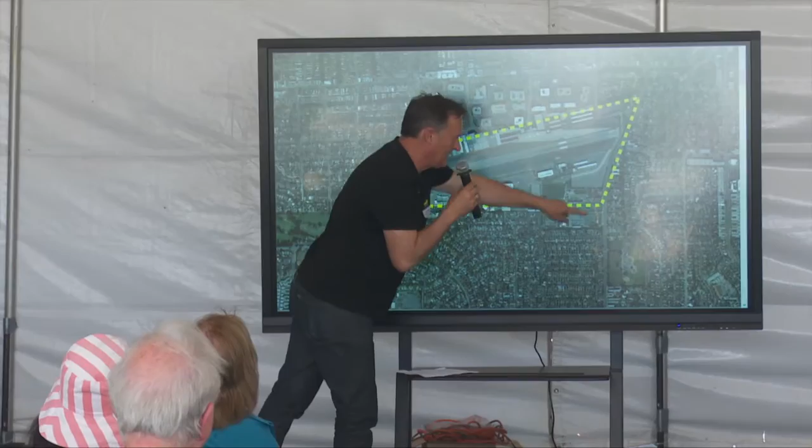A lot of you remember this diagram - I think there are some copies of it. About two years ago, we worked with the airport to park, and this is a diagram that shows what we heard, a listening diagram. Through a whole series of exercises and design ideas, we compiled everything we heard about what people thought might work in the park. It's important to keep in mind that we're working in this area, but we want to make sure anything we do here could conceivably work with the bigger idea.

So today we're really excited to start talking about this first 12 acres. With the existing 8 acres in the current park, we have about 20 acres to start with, which is an amazing public open space. But all the decisions we make here, we want to keep in mind that someday they might have a bigger expression. So we keep looking back at this diagram.

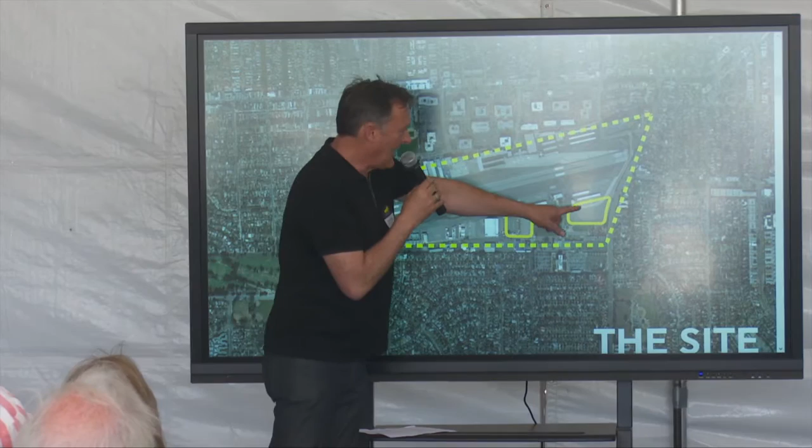So here's our site, and we're in this location right here. There are two specific pieces of the site - one is the tie-down area up here that's just a little under 7 acres, and then the area by Barker that's a little over 5 acres. They're disconnected sites.

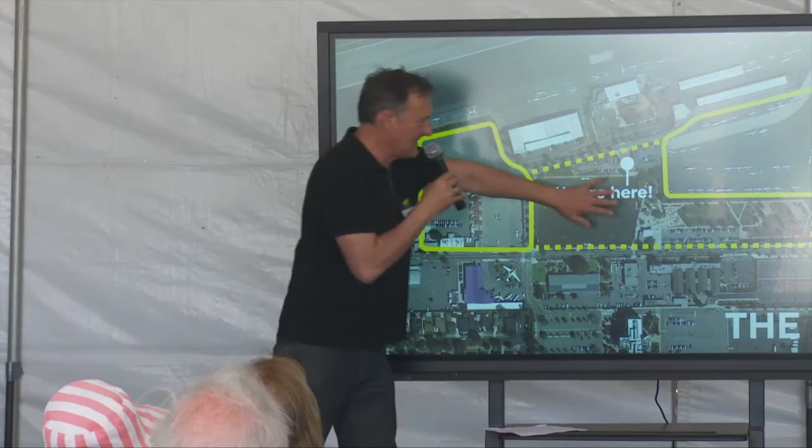One of the things we're really excited about, and that I think really shows the foresight of the city, is they're saying you can look at the entire parcel and think about the whole piece, how it all works together. Your work is really going to be located in this location and probably in this location, but we really don't want to have three disconnected places - this place, and that place. So if we need to start making modifications to tie all this together, let's find the best solution, the way to really make this a cohesive 20-acre place as opposed to a 6-acre place, an 8-acre place, and a 6-acre place. I think that's really important.

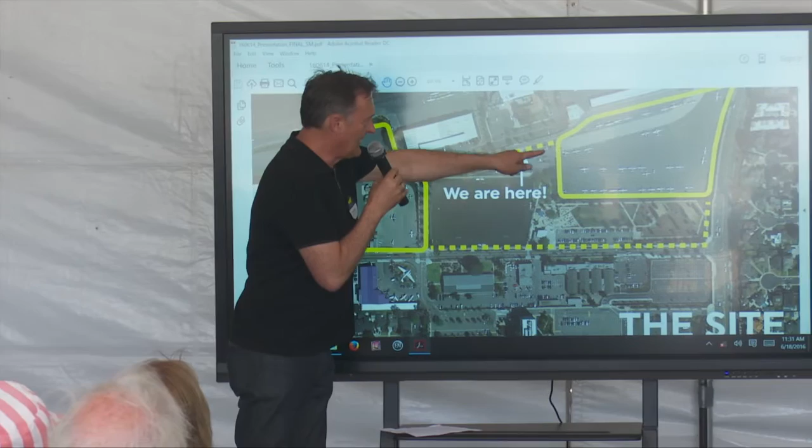So we're right here, the other tent is over here. Those cones I talked about are all lining up out to the street, and the other tent is over in this location. Thank you.

It helps us inform ourselves about how big this place is. I think we want to always be doing our work in reference to what's happening globally. How do we design a park here that's really part of a whole global conversation about open space and recreation? So we always look at the best examples globally to inspire how we make decisions here. There are two examples I want to show, which are pretty simple, and we've talked about them a lot, probably many of you have been to both these places.

Culture. In both the High Line and in Tempelhof, the idea of trying to have some kind of memory of the place was really important for those designs. So we keep looking back at the history of the airport and its different periods of development, trying to understand how we can tell the story of that industrial landscape.

The solution we come up with collectively needs to be beautiful and light-handed—not thematic and gimmicky—but it needs to address this site and what its role has been in the past. Our goal is to have flexible spaces so different kinds of community events can be set up, different fairs and festivals, and a range of other community activities, which might also include some community gardens.

In the various tents, you're going to see lots of images of different kinds of things that might happen in the park, and we'd like your input on what your priorities are. There's probably not room for everything, so part of the goal for today is to get feedback on what you think is essential and what you'd like to have if there's additional room.

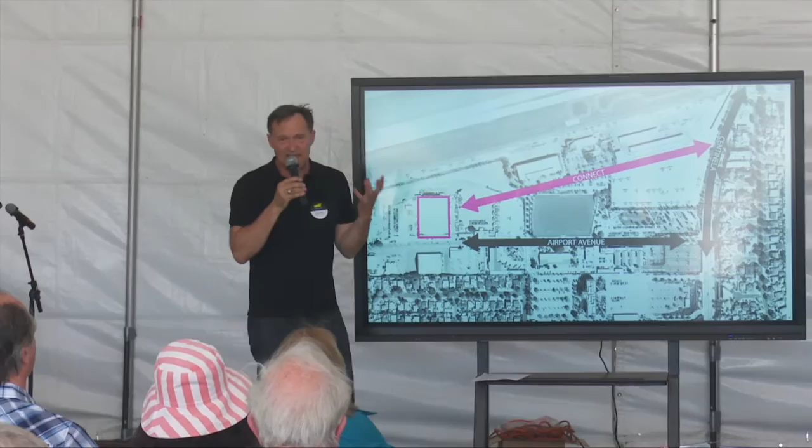You can drive by on Bundy pretty quickly and not necessarily notice that intersection, but you don't have a lot of visual connection. One interesting thing about this site and its layout is there's a direct link between Bundy, where the ground is exactly level with the street, and if you run parallel down to the existing buildings and the runway, how it connects to Barker. There's a very clear linkage.

I think one of the ideas we feel is pretty important is to try to find ways of making the park visually open to the community, giving it more presence. Although you may not enter the park at this point, you should visually and emotionally know the park is there. That's really the front door for what we're doing. And the idea that Barker, and events that happen here, could also be a terminus for this link that might join all these different places together is a preliminary design idea we've really been exploring.

So I want to show you three options, and all the different options are basically looking at three or four different criteria, with each option prioritizing those criteria differently.

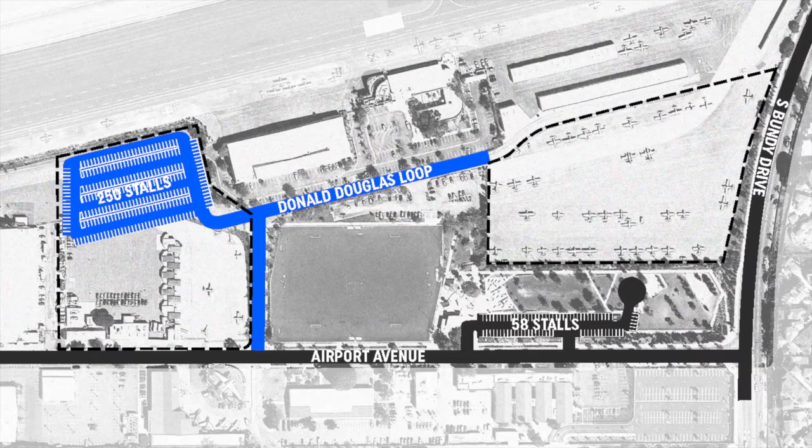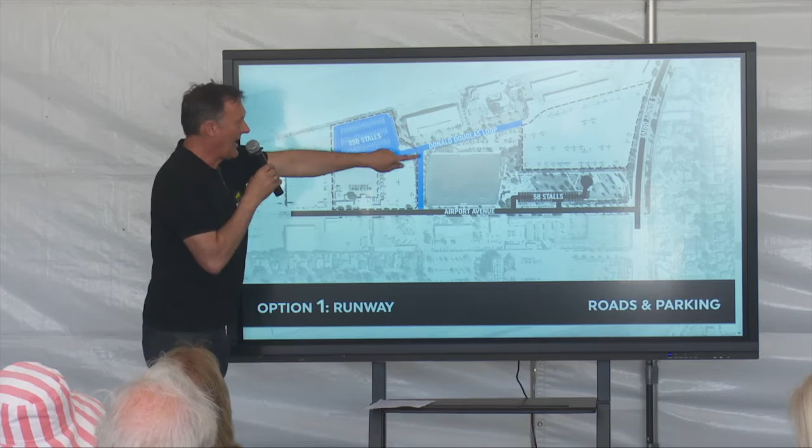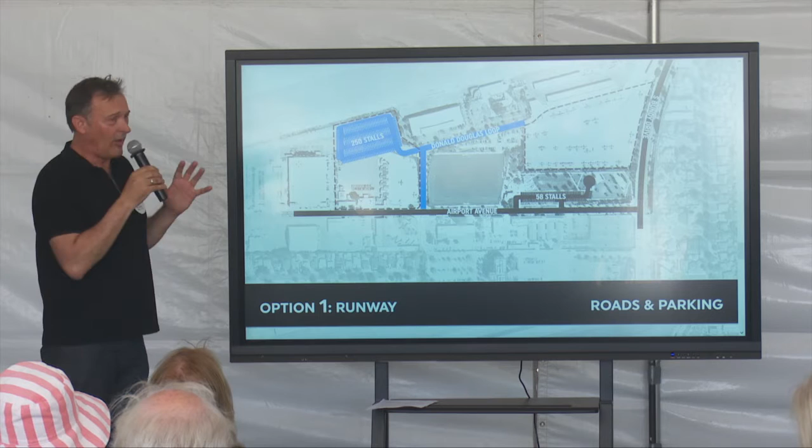One of the first important things to resolve is how do we circulate, how does the circulation work for the new park. So this option, scheme 1, we're calling the runway scheme, just so we can all address it in the same terminology. This scheme basically says let's keep the Donald Douglas Loop Road where it's located, so we don't change that, but we take the area of the tie-down area closest to the runway and make that a much larger parking area. This gives us about 250 stalls of parking, and when you look at the quantities of all the fields and park spaces and do parking studies, generally about 200 to 250 parking spaces would be the usable number for all those facilities.

This area of the site, because of some noise issues and its proximity to the runway, seems like a really good place to put the parking. So scheme 1 basically takes the existing road, creates a loop, and uses that as a parking place.

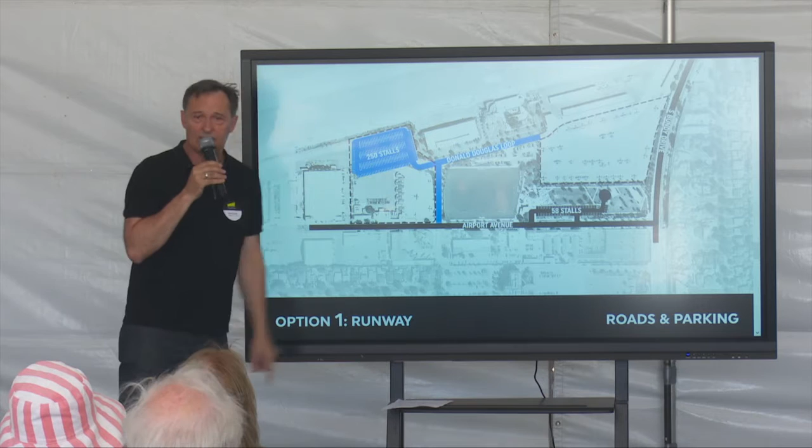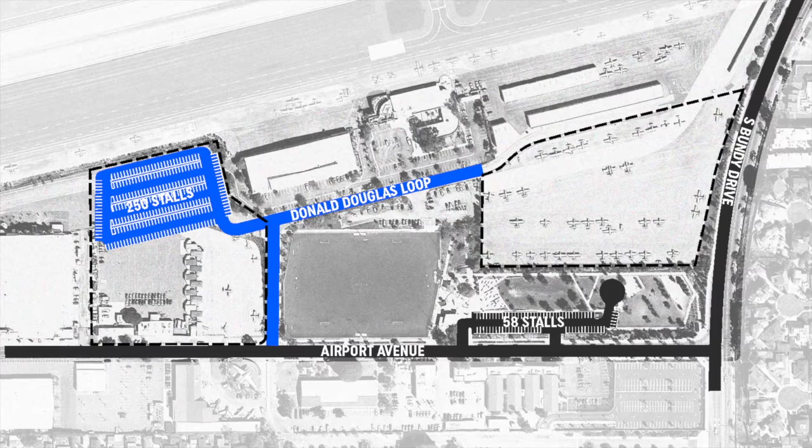Some of the disadvantages of this scheme are that the road basically goes through the middle of the park, so to get from one end of the park to the other you need to cross the road. That could be considered a disadvantage in terms of circulation and safety, but this is certainly a more economical solution because we're not spending the dollars to move the road or reconfigure it in some other way. So there may be trade-offs with that.

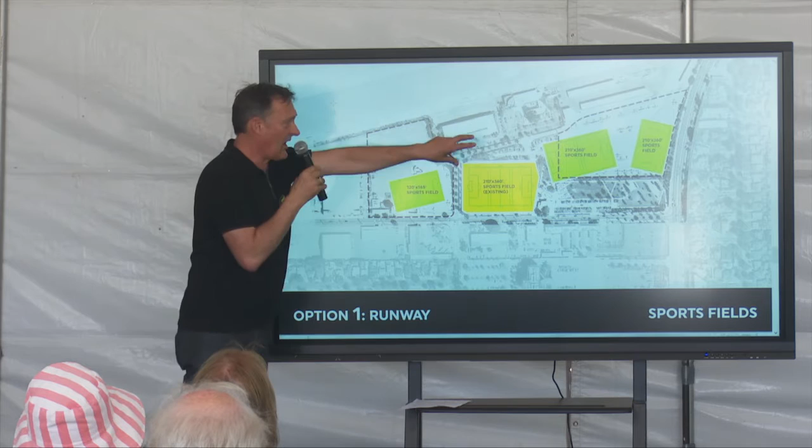Scheme 1 looks at adding 3 more sports fields, for a total of 4. This is the existing field right next to us right now, and we're looking at adding 3 other fields of varying sizes that can be broken down in different ways. We'll talk more about them in detail at each scheme about how those fields would be used, but you can see how they're working on the site.

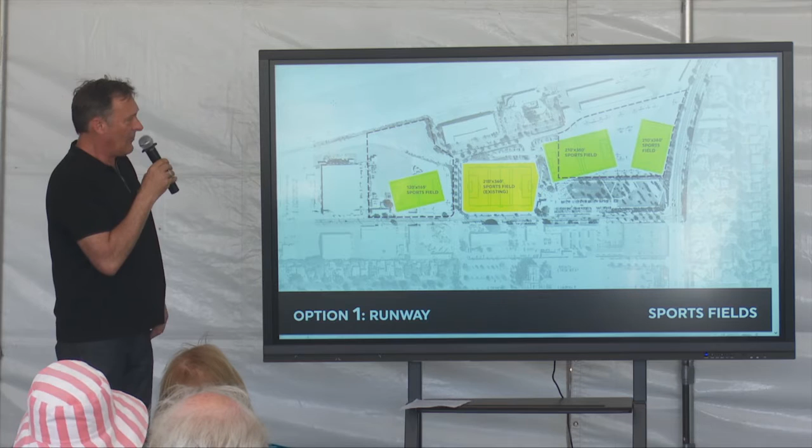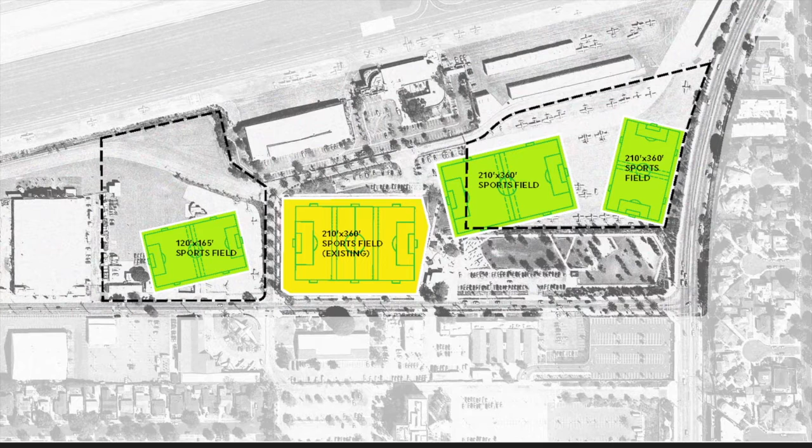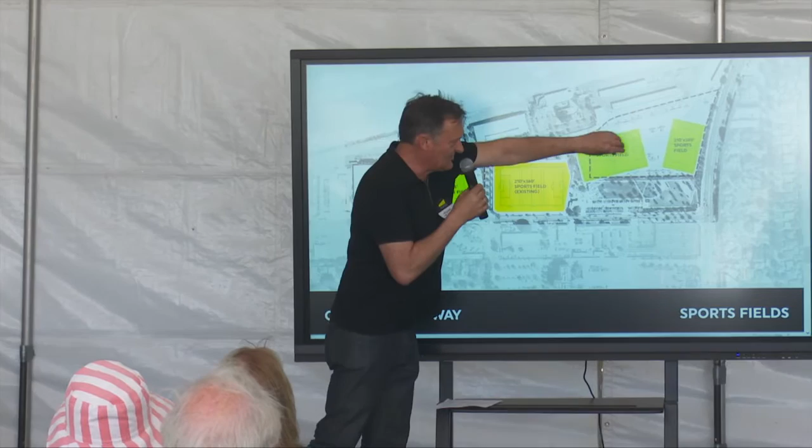One thing we've been very conscious of is that because of all the fencing requirements for fields, if you make them touch each other and align them right next to each other, you end up with these very long barriers or walls. So in all of our schemes, we've tried to break up the connections between the fields so we can do other things with them, whether they're places for landscape, circulation, places to view the games, or other amenities. If we made them touch each other, there would be a wall separating this side of the park and that side. By separating them, you get the possibility of having linkages and connections, which seem really important to integrate the park together.

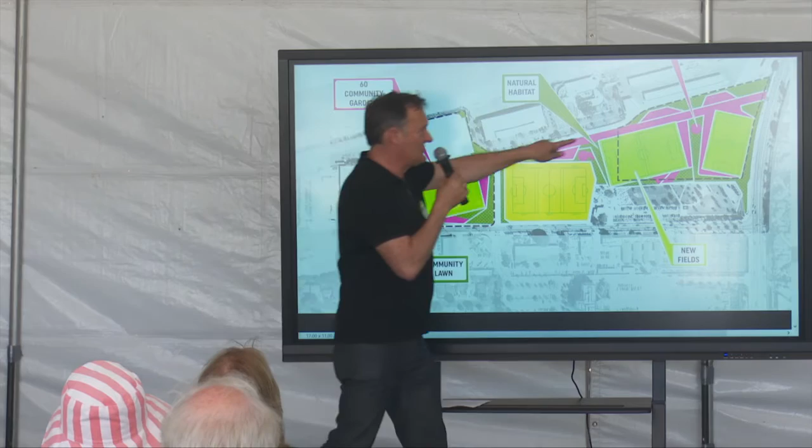This is a diagram for our first scheme, the Runway, which looks at how those other spaces might be used. Here you can see the existing road that comes in, Donald Douglas Loop goes along this area to serve the existing buildings, with the parking lot over here. There are the 4 fields, and then a circulation path that basically links all the fields together, which you see in pink—that's the runway.

We're seeing that as a multi-use pedestrian walkway, and there are many ways it could be organized—by speed, so walking might happen one place, bike riding somewhere else, running somewhere else. But the idea is that all these spaces are linked together by this big circulation linkage. The cones out there that I mentioned are an example of how wide that would be, and those cones are located right here.

Flexibility is very important, and one reason this scheme is strong is because there are lots of other ways it could be used. For example, a festival could be set up from here to here with booths and tents, and occupied in many kinds of ways.

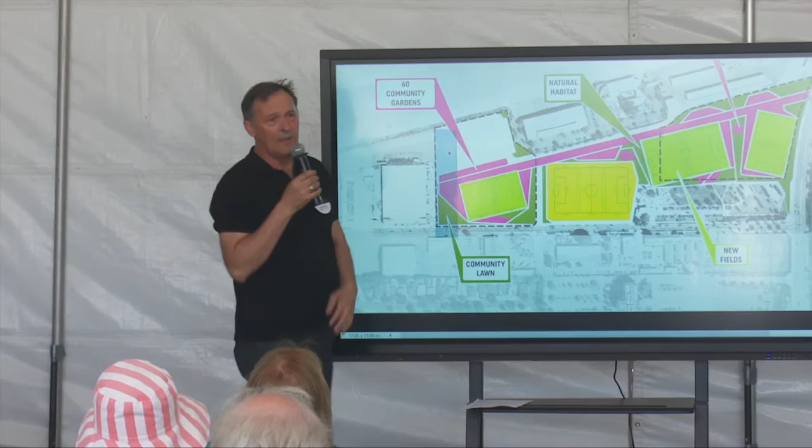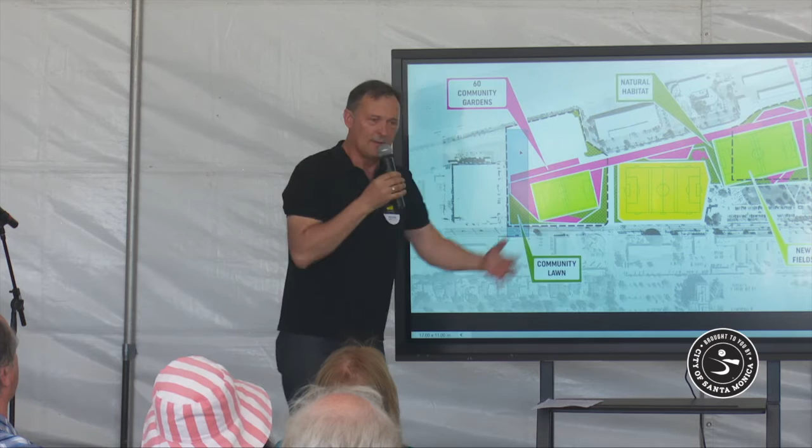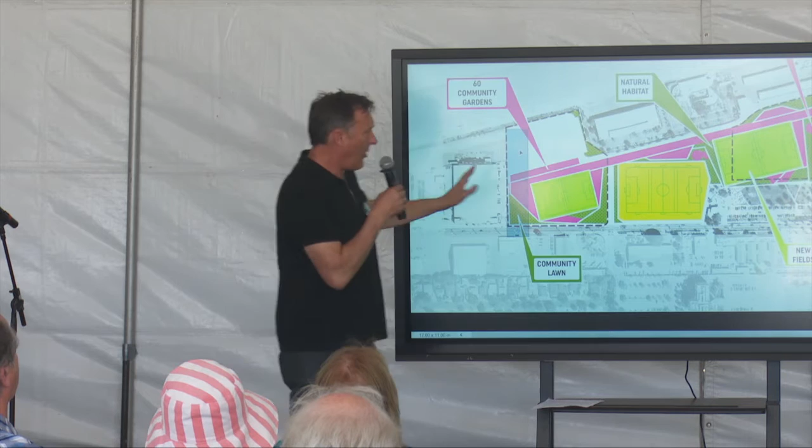So in this scheme, the principal pedestrian organizing feature is this runway piece. Then in between each of the fields, where you see this green dot, we're bringing back this landscape of the natural habitats. In those places, we're taking up the ground, the concrete, regrading it, creating berms in various places, and dealing with issues of water—it's all being drained to those landscape areas. It's also the place where we get shade.

One of the things we're all very aware of here today is that it's pretty hot and sunny. So by having these serpentine landscape pieces between the fields, we get lots of places to have shade pockets where people can hang out.

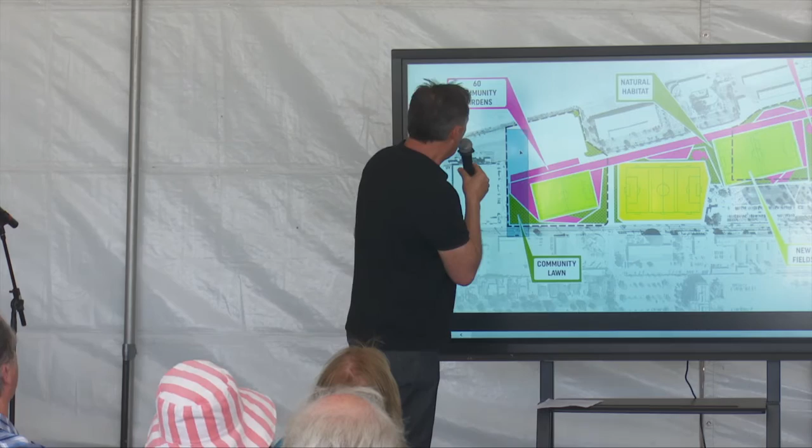In all of our schemes, we're also trying to include other kinds of functions. So in this scheme, for example, we're putting some community gardens in this location. That seems like a good place for them because it's next to the parking lot, so you can park your car and use the community gardens. People also see the community gardens as they're going to the park, which gives really nice visibility.

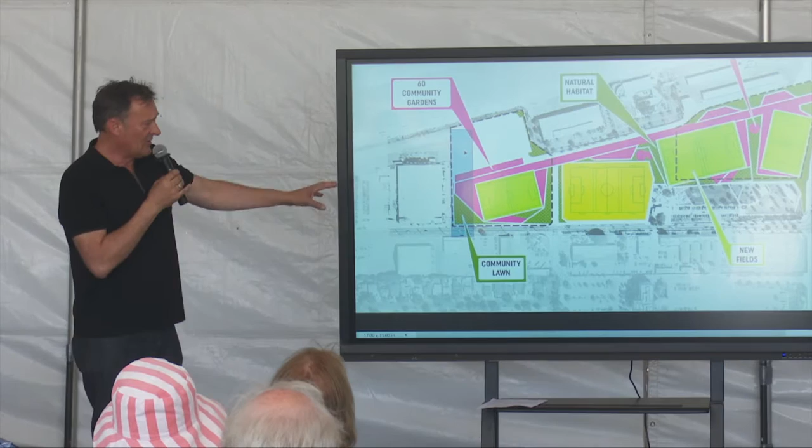The last important feature of this scheme is that next to Barker, we're talking about having a community lawn. Most likely all these fields will be artificial turf of some kind, so it'd be nice if somewhere in the park there's an actual lawn that could be used for open sports, festivals, or picnicking. We're trying to find a way to make that happen in this location, which I think is a good place for it because of the visibility it has from the main street.

And here is a plan of how all that might go together. There's a lot of information on this particular drawing, but when you look at the plan a little closer, you'll start understanding it.

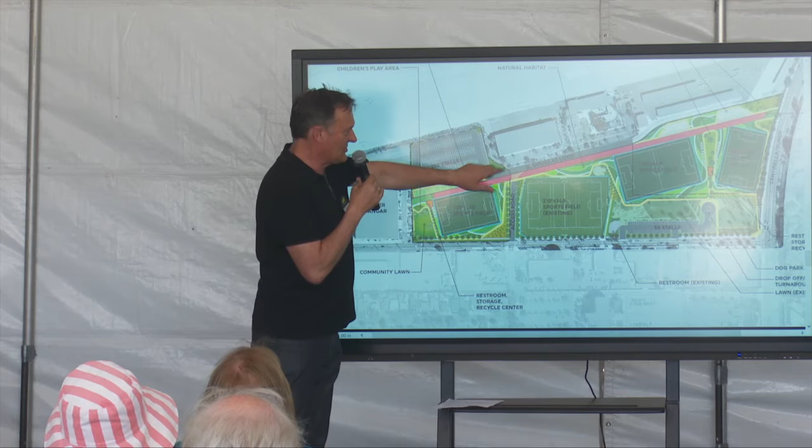Again, the main road stays in its existing location, as is Douglas Loop, the new parking lot. Here are the community gardens. Here's this pedestrian walkway, which goes all the way down the site, and you see it at the end of Centinela.

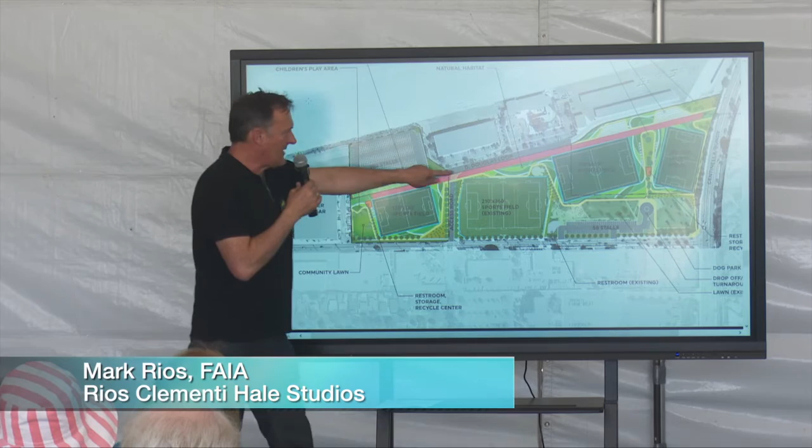It does cross the street here, so this is one location where pedestrians and cars have to be careful. Off of that, there are many paths and ways you can move through the site in a much more organic and natural way, and those are the foundation for this ecological landscape that has lots of shade in it.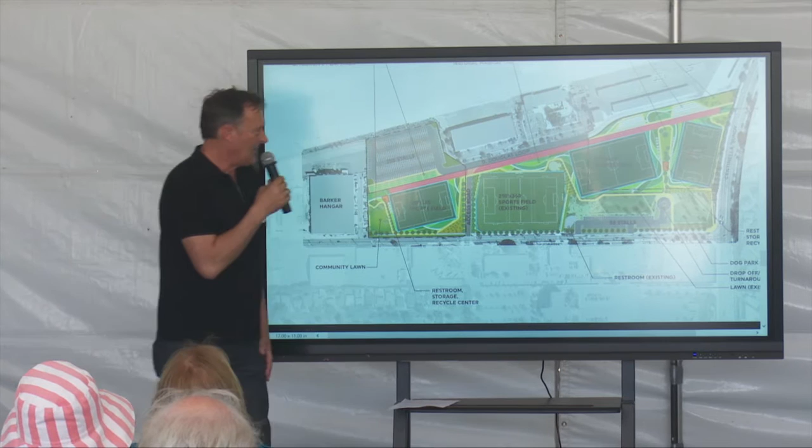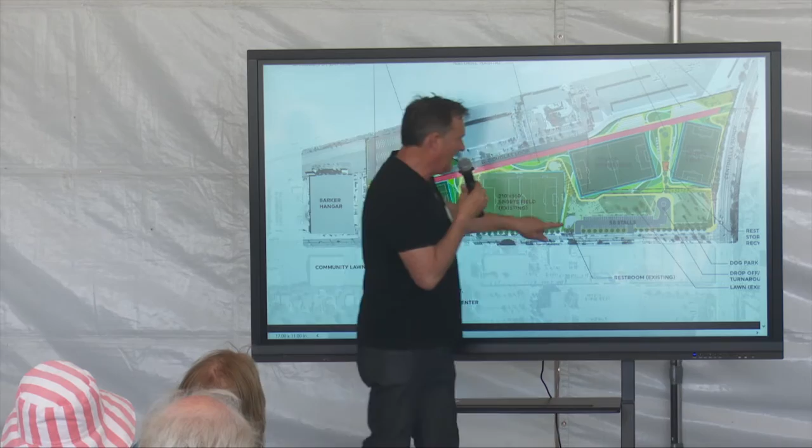We're proposing this scheme to build an additional restroom and storage building in 2 locations, one down in this location and one up here, and the one that's existing remains.

Each one of the places in the park between the fields has a different program role. For example, we're thinking this might be a children's play area over in this location.

There may be a berm here, so you can actually be up on this berm and look at the fields, or on the other side of the berm, look at the planes taking off. The berm also gives us a lot of acoustic separation, because this is really the noisiest end of the airport here, where planes are idling and about to take off.

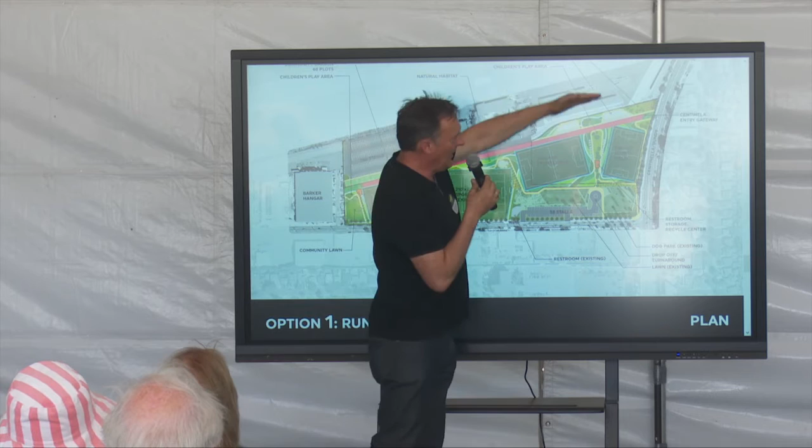This berm in this location really helps protect all the fields from the most intense location of noise. I'm sure you'll have lots of questions about the particulars of this scheme.

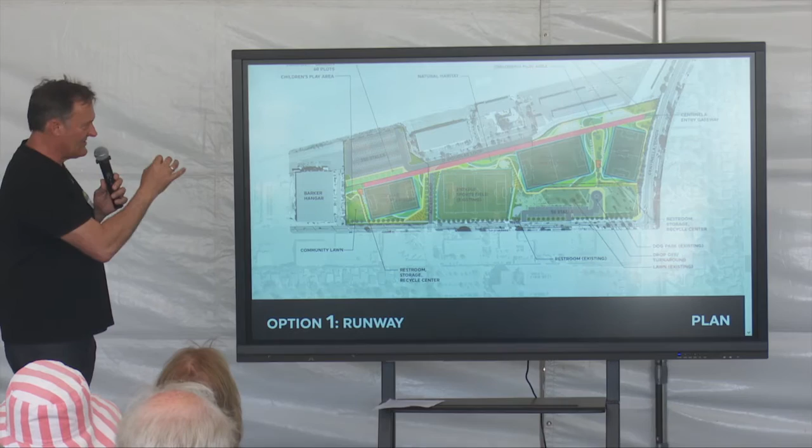I want to go through all the 3 schemes and then talk about them generally and see what questions you have. But the key things about this first scheme are the road stays in its existing location.

We have 3 new fields for a total of 4 fields. We have 250 parking spaces, and we have a very flexible pedestrian kind of open space that can be used and set up in lots of different kinds of ways, and definitely has a memory of the airport.

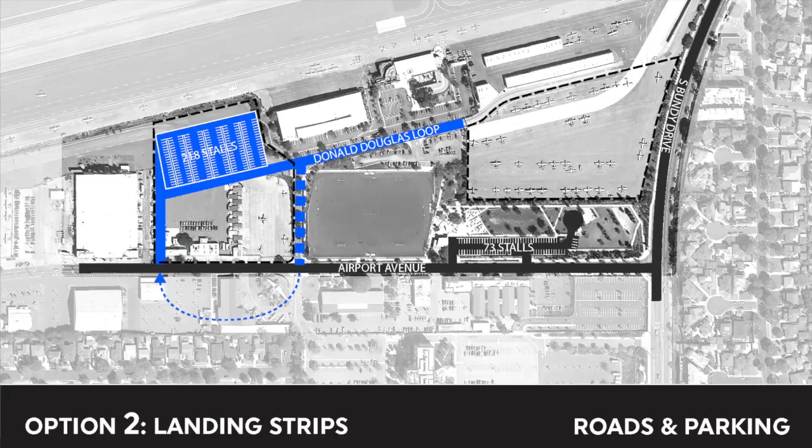Okay, scheme number 2. We're calling this one landing strips. So this scheme says, let's do something to make the whole park more continuous so a street doesn't bisect it.

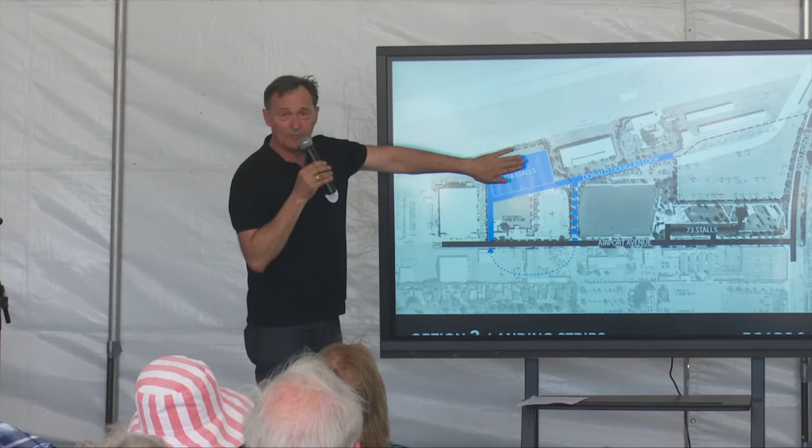So this is where the existing road is. We're going to take and shift it over next to Barker, and so you'll enter at this point and connect it with Douglas Loop. The parking is in the same location, but what that allows is that now the whole park is on one continuous piece of land.

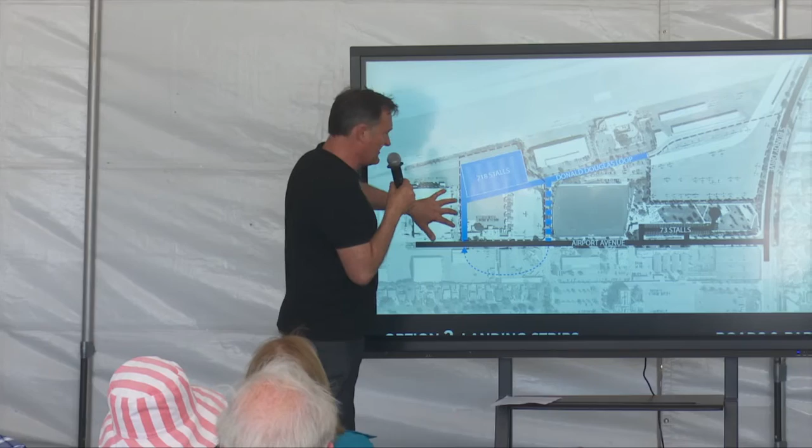There aren't cars going through it anywhere. And so just as far as safety and crossing a street and activities, it certainly makes for a better environment. It does involve more capital costs as far as moving the road down, but it gives us more freedom about how we actually plan and organize that space.

This scheme puts the road in between the parking. So although you don't cross when you're in the park, there is still a necessity that once you park your car, you have to cross the road to get to the park.

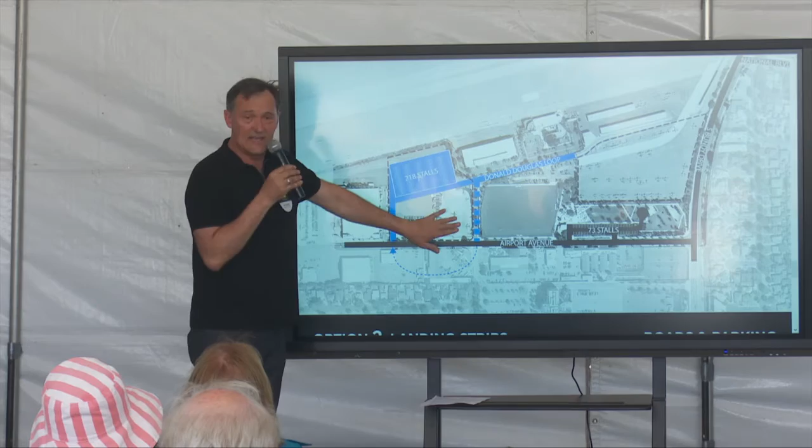And so there will probably be key locations where we have crosswalks, and parents might want to watch their kids at those particular points. But once you're inside the park, it's all continuous area.

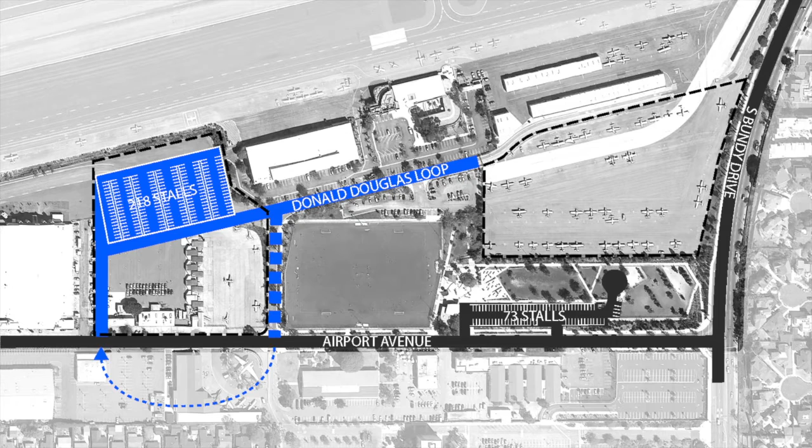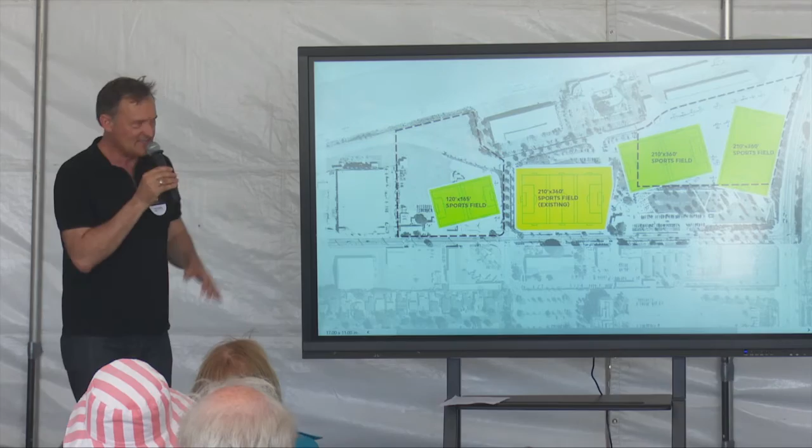So this scheme also adds 3 new fields. The fields are slightly different sized, and they're in different locations. And SportsForce can talk about the pros and cons of each one of those fields.

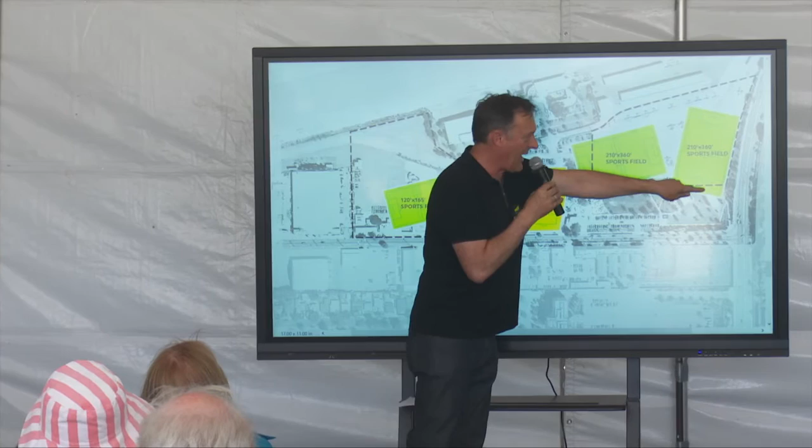We get a bigger field down here, and we're taking a little bit of the dog park. Not a lot, but just the very back corner in order to get that field to fit. But again, we're getting a maximization here of the park, having lots of sports fields in it.

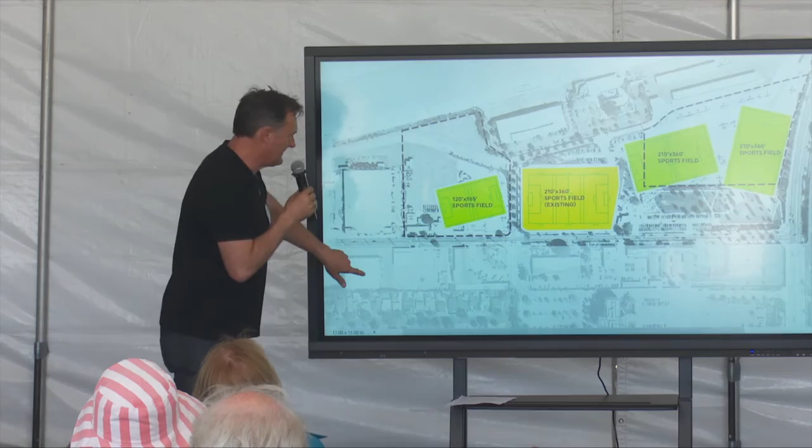This is a diagram of where other things are going. Here we're changing where the community gardens are located. So in this scheme, we're putting it on this edge of the parking.

And so it means that people going to the park are not necessarily walking through the community gardens. They see the community gardens, they're very present, but they're not en route to the park. There's slight separation.

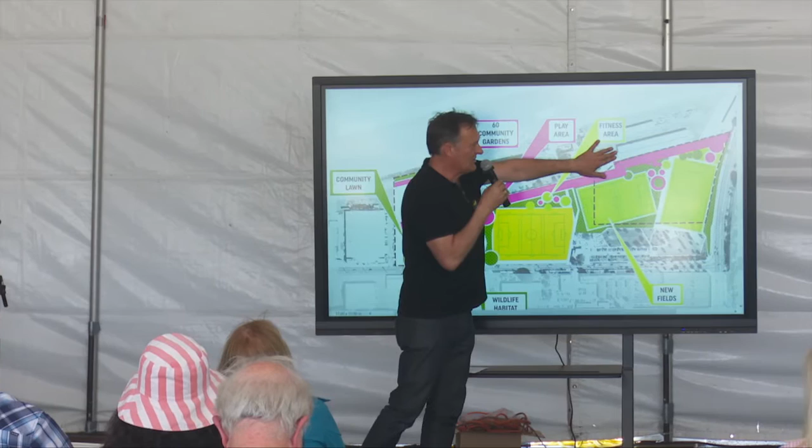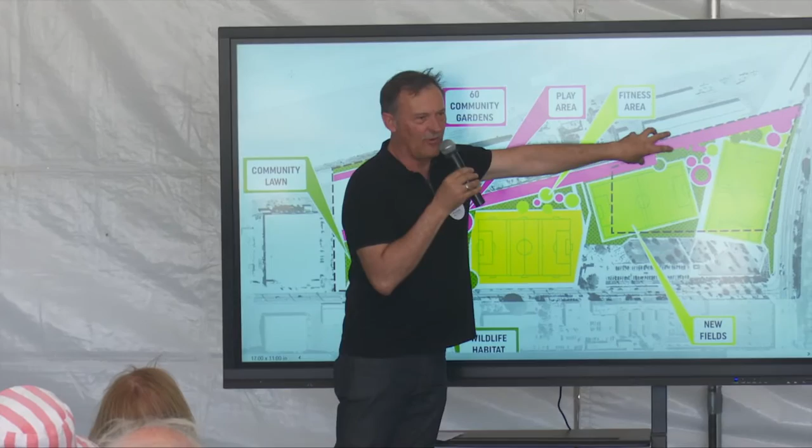We're looking at having key elements of program at each one of these points in between the fields, which you'll see in the plan. We're still having a berm to give us acoustic separation, but we're starting to break this long pedestrian path to create a special zone that might be used for other kinds of activities and events.

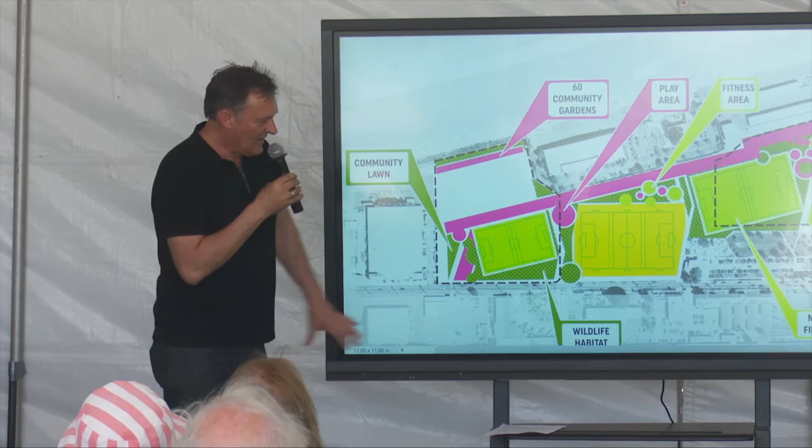This scheme still has a community lawn down at this end. Because we don't have a road in this location anymore, it starts opening up to the rest of the airport in a stronger way, because now there's a big landscape connection you can move through in between the fields and come to the main pedestrian walkway. This is how you move through from the existing restroom building and parking, and from the park you can also slide through that way.

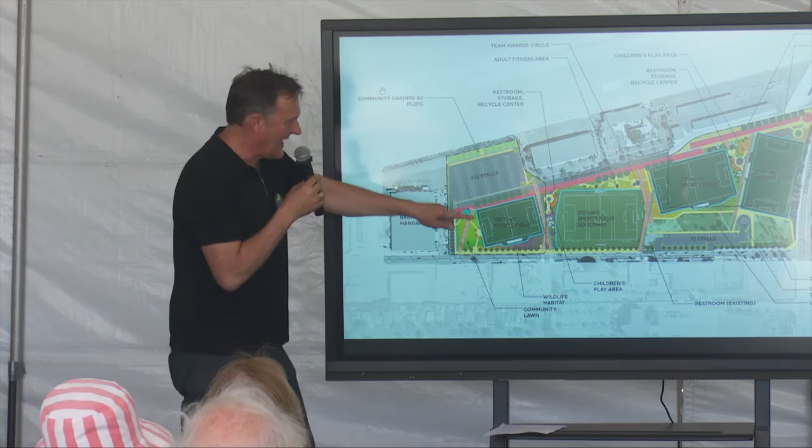This is a plan of scheme 2, the second option, where you can see how the road has been relocated. You can see these strong paths that bring you from the main road through and in between the fields to link with the main pedestrian area.

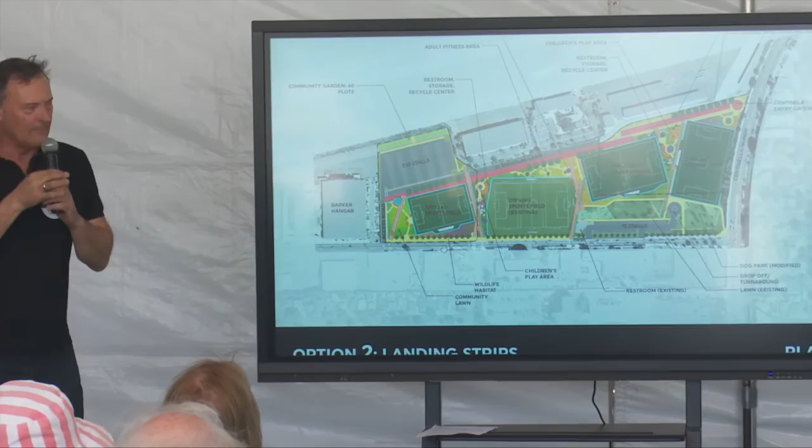Now, this is really not a design scheme, it's an organizational idea. You may look at this and ask why there are pink and orange lines drawn on the paving - we're not suggesting the paving is pink and orange. All we're saying is that it's a special pedestrian space, and it should be developed with a lot of rich ideas, which are yet to come once we know what we're designing. This drawing is trying to give a lot of character and help us understand where things are located and the nature of each one of those things. The design will develop once we know what all those locations are.

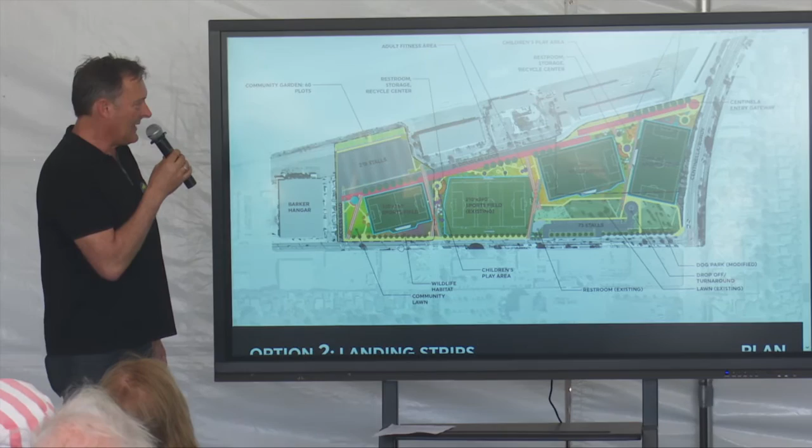In this scheme, we're looking at having a new restroom area located here, and we're thinking about keeping the existing restrooms over at that location. Some of the other amenities we're adding include adult fitness areas. There's actually another restroom we're adding here, so we'd have one there and one over here, and a whole series of picnicking and community spaces along the main walkway area.

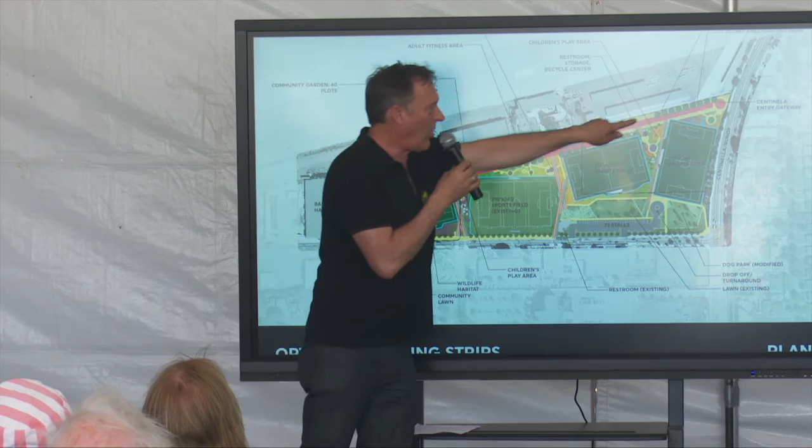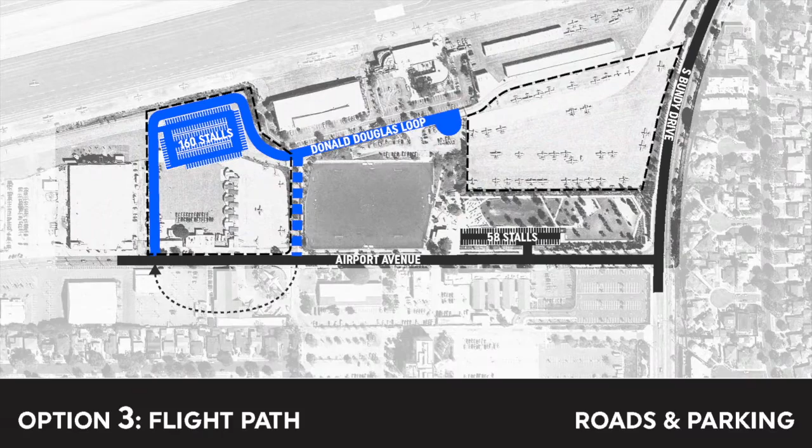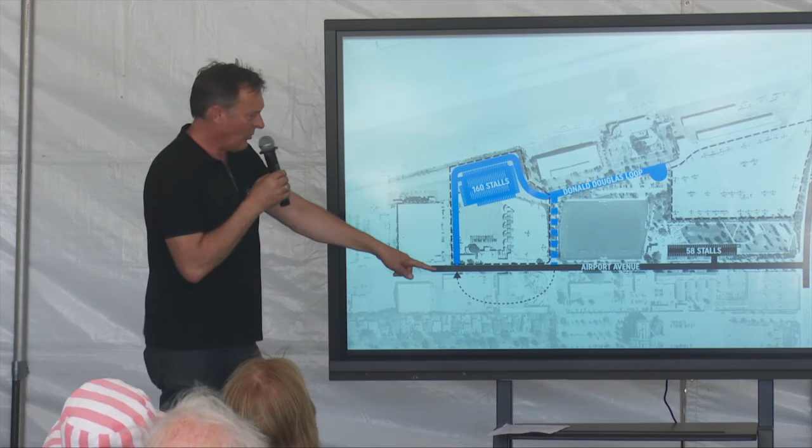The third scheme, Flight Path, does another move with the circulation of the roadway. We're taking this one out, making the main entry be at this point next to Barker, but instead of having it line up with the existing Douglas Loop, we're wrapping it around over to the runways and back around, putting the parking lot on the inside of that.

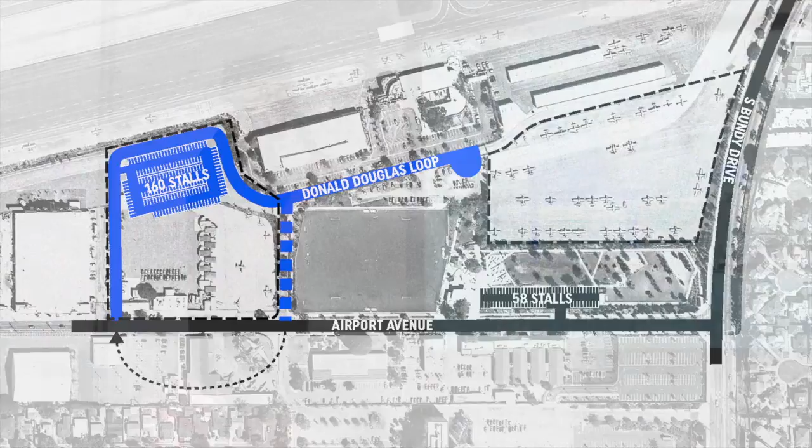The pros of this scheme are that once you park your car, you're immediately in the park and not crossing any roadway, so safety issues are really minimized. The disadvantage is we have a lot of roadway, so we're paving a lot of area that we might do something else with, giving up more space to road and paving than to ecology and garden.

One thing we're all trying to evaluate is where on the scale of having no intersections of cars and pedestrians do we want to be. Do we want a scheme like this where we completely separate it, with certain pros and cons? Or can we live with it between the parking and the park? Or is it okay for the path to actually have to cross it? We'd like your input on all of those positions.

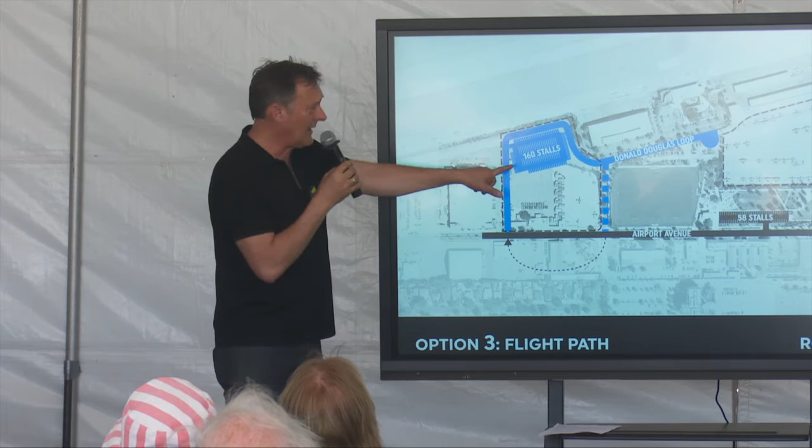One other thing to note about this scheme is that once we put the road around the back side, which makes this nice connection between the park and the parking, we get less parking - because the road takes up more area, here we only have 160 stalls, where in some of the other schemes we had 250 stalls. So substantially more area goes to the road and less goes to parking.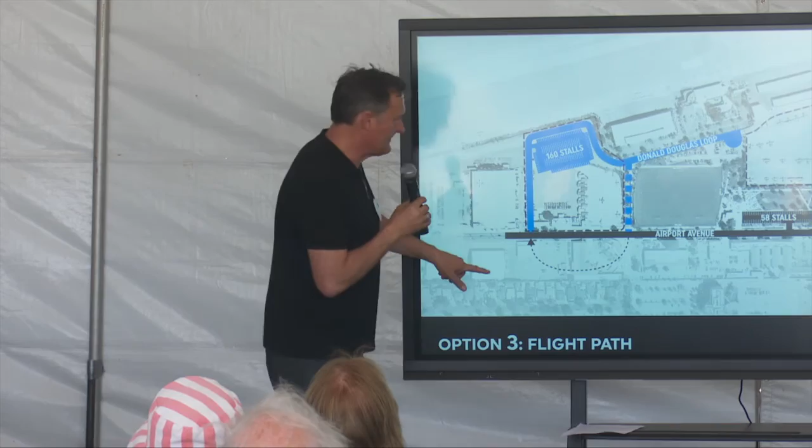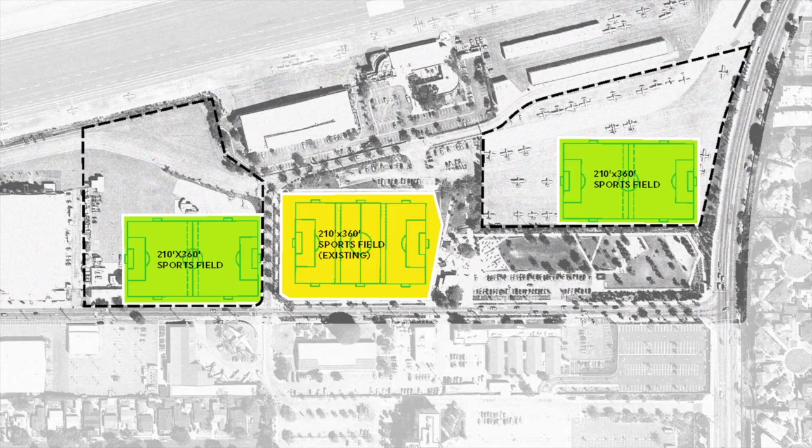In this scheme, we're looking at adding 2 new fields, but these fields are larger than the other 3 fields, and their orientation is all parallel to the existing field, which is required based on the bigger dimensions of it. And because we have fewer fields now, we end up having more space in between the fields.

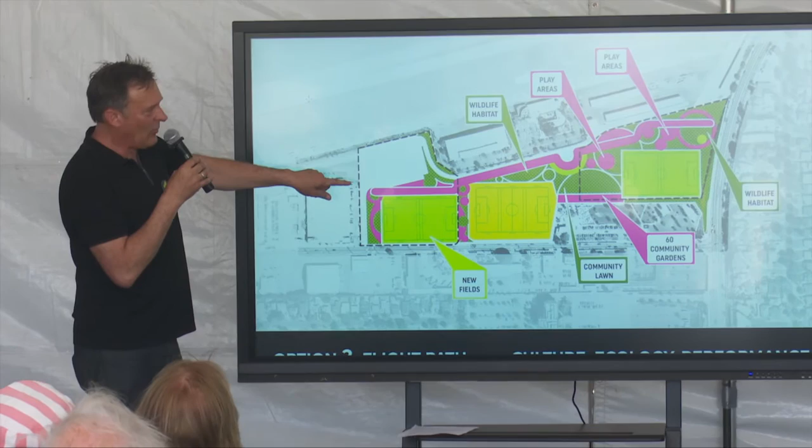So in this scheme, you can see the 3 fields, and you can see this main walkway changes character quite a bit. It aligns with this field, then it makes another kind of place, then it goes by the next field and has other kinds of community and wild habitat spaces. Then there's a very large park space in the middle of the park.

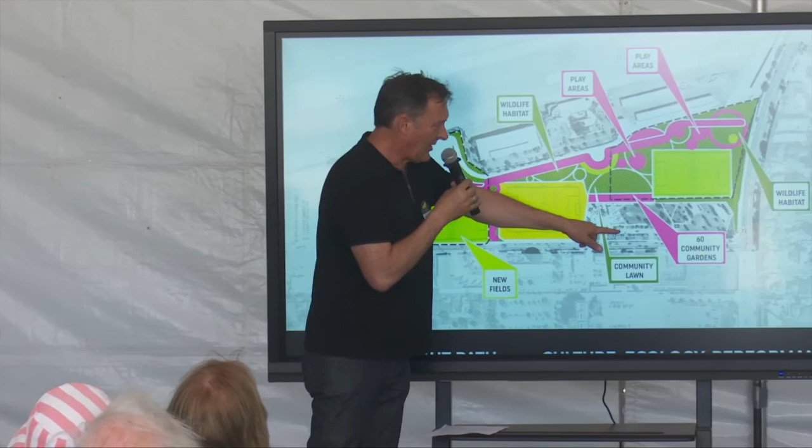And in this scheme, we tried to concentrate as much non-recreation space in one location, so that the park would actually feel really large in its non-sports field parts. The community gardens are located here in this particular solution, assuming that this parking lot would be the main place where people would park to use those community gardens.

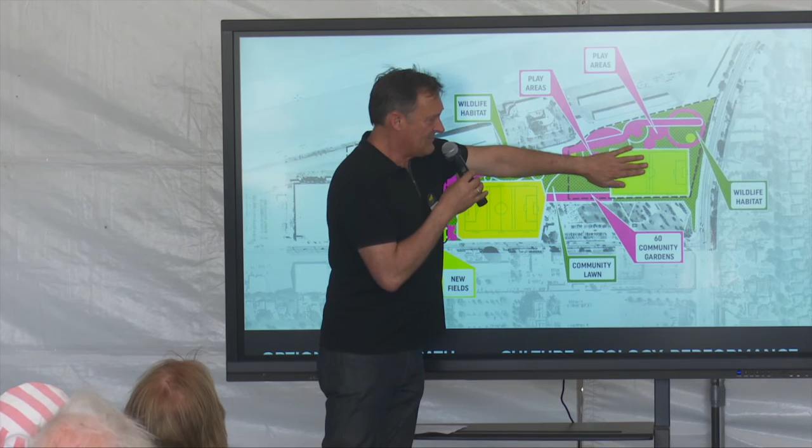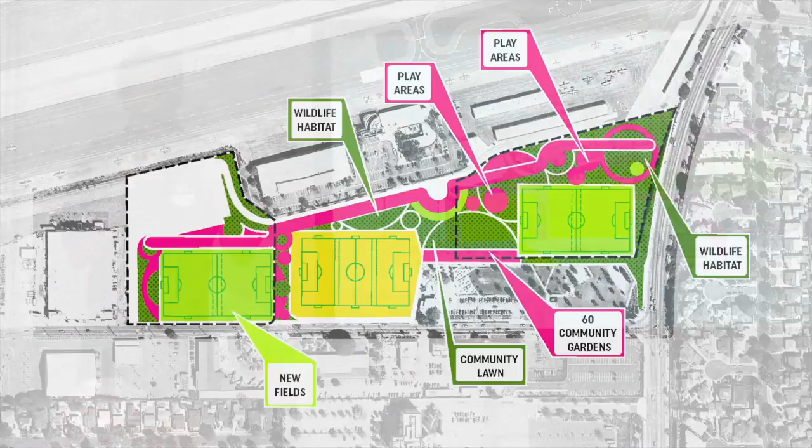Then we have our last field up by Centinela. It's parallel to the dog park, so we don't need to take any of that space. And because that's the smaller of the fields, it gives us a lot more park space here to have other kinds of play areas and landscape pieces in it. So we're trying to dial up and dial down as a way for all of us to understand the relationship between sports fields and park space and where the circulation goes in between all of those.

And here is a plan of Scheme 3, flight path, as we're calling it. Here you can see again the main access road, how it loops around the parking area and then ties back into the Douglas Loop. The 2 new sports fields are added here and here.

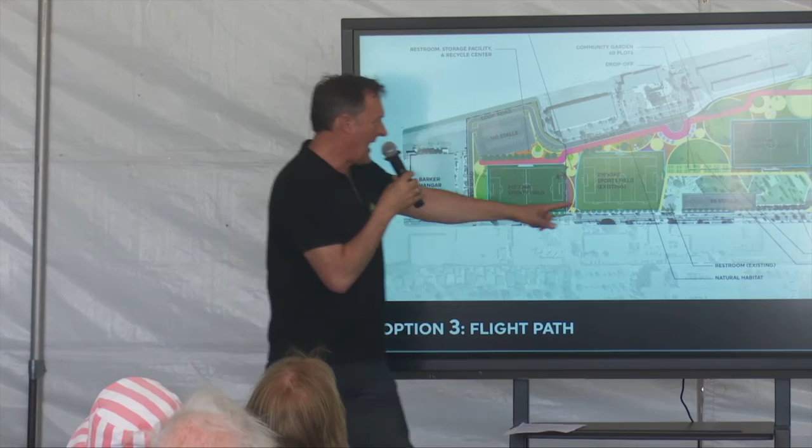This sports field is basically exactly the same size as the existing sports field. And this one is actually the same size too—I thought it was smaller, but it's the same size.

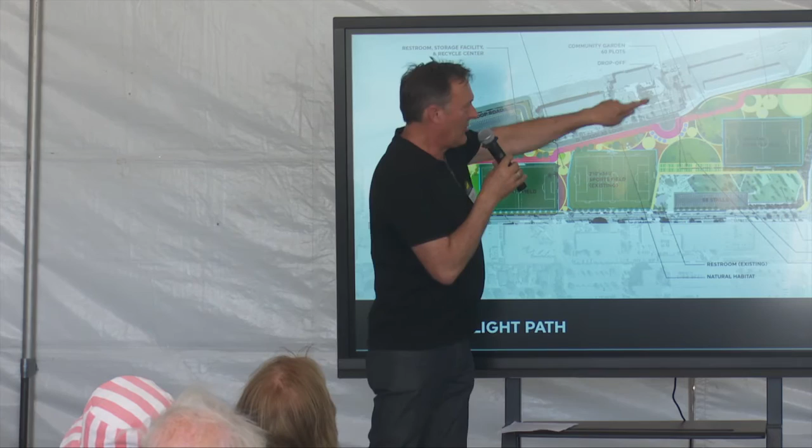And then you can begin to see all the ways that we're creating movement and circulation spaces in between the fields, really trying to have one large concentration of park space. Parking is continuous with the park space, so from the parking you move directly onto the park and circulation space—you're moving through all these spaces without crossing traffic in any of the locations.

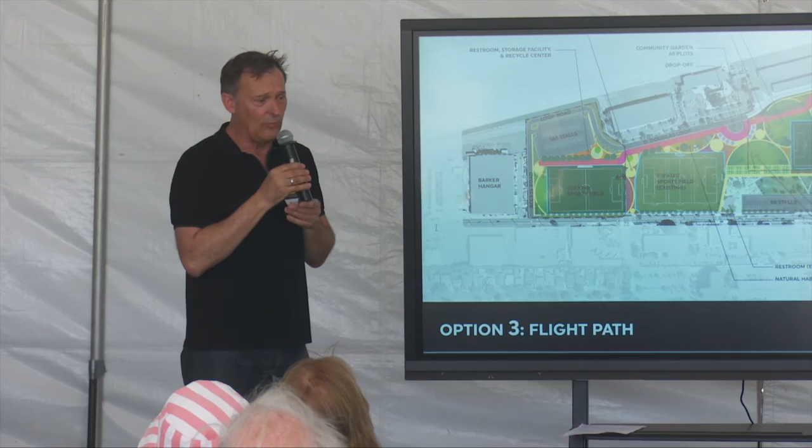Going back to our initial 3 big concepts, all these really need to operate from a performance point of view. How do they really work with all the sports fields? How many do we need? What's the best orientation? How do they provide great cultural opportunities in all the spaces between the sports fields, and how do we make really wonderful shady places for people to watch and gather?

And then the last one is ecology. How do we take this ground plane and break it up, letting nature and a natural plant successional community come back in? So we're really looking at doing that in between the fields, as places you move through, but also that give you shade and more of a sense of a naturalized landscape.

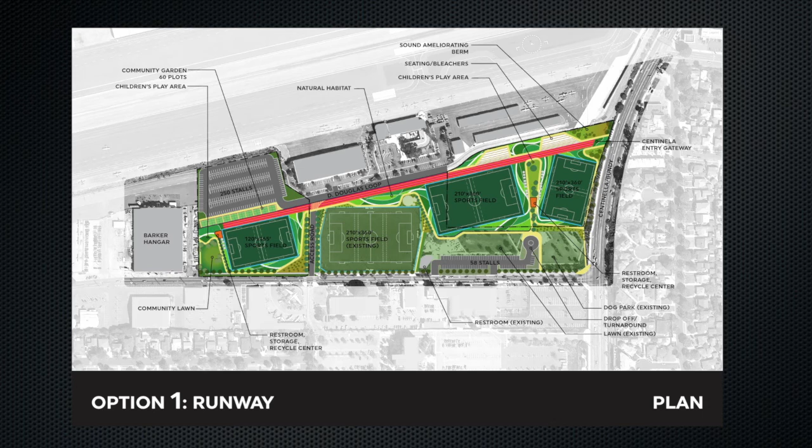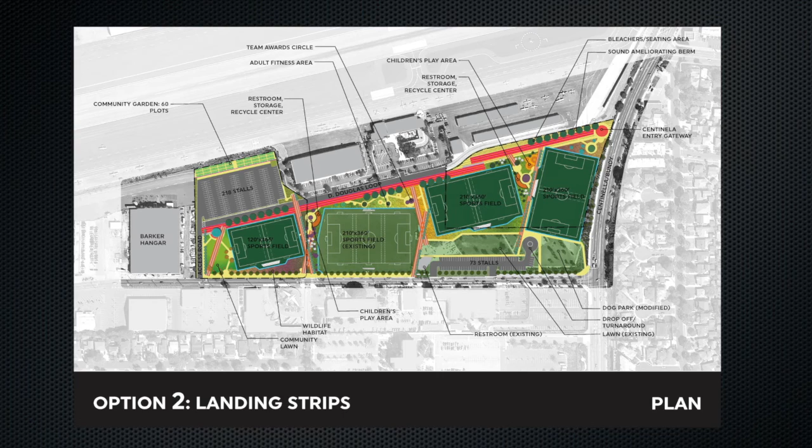So the next thing we're trying to do today is have you take a couple moments to give us some of your feedback. We want your feedback on the 3 schemes—what you think the strengths and weaknesses are of each one—and then look at all the images of the other components that might fit in the park, and give us your priorities of which ones really work, which ones are high on your scale that you'd like to have, and which ones may not be as important.